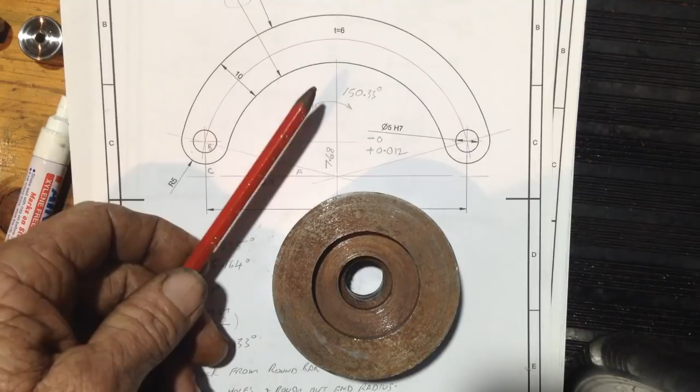Okay, our original plan was to make this out of a piece of solid round bar. Now I did have a piece of 304 stainless, but unfortunately it's not quite big enough in the OD to match up to these radiuses. And I've got this piece of mild here, but that's a bit boring. I want to go for something a bit more exotic than that.

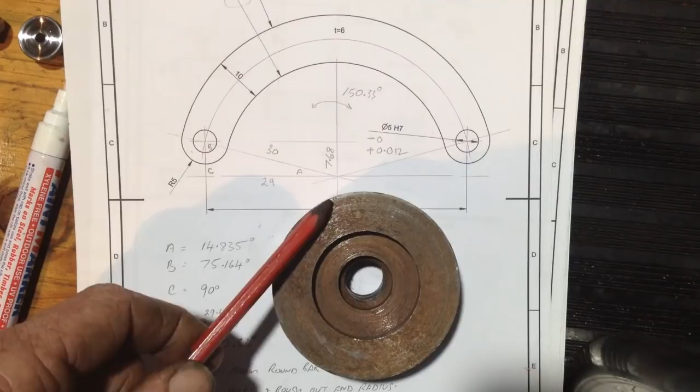But to do it the round bar method, I feel, is the easiest way, as once you'd had it in a lathe and machined the ID and the OD to match the radiuses here, you could set this up on the rotary table in the mill. All the information is on the drawing here.

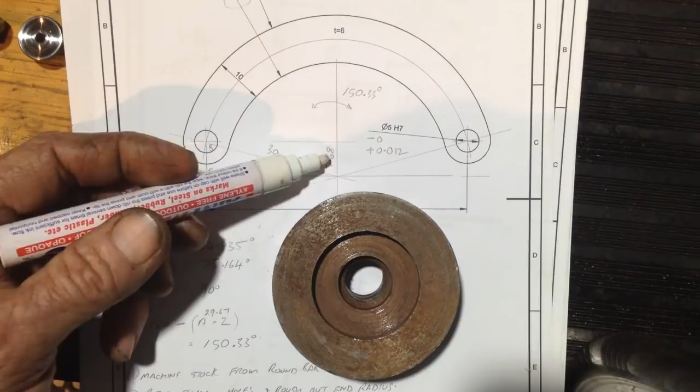You've got 150.33 degrees as your arc for your centres. You've got a 7.68 offset from the centre of your diameters or your radii to a line drawn across where the holes are. So they're easy offsets to do on a rotary table. So then you've immediately got your positions for your two holes.

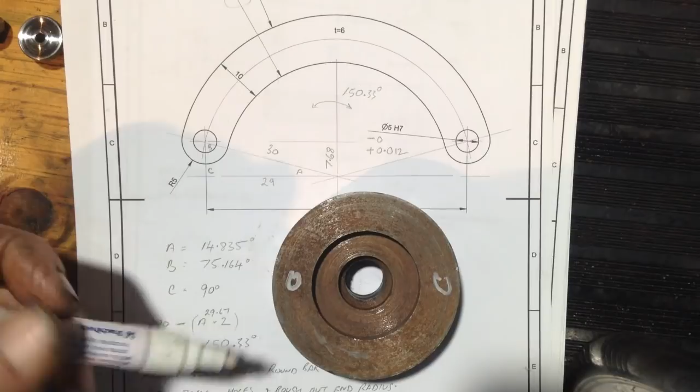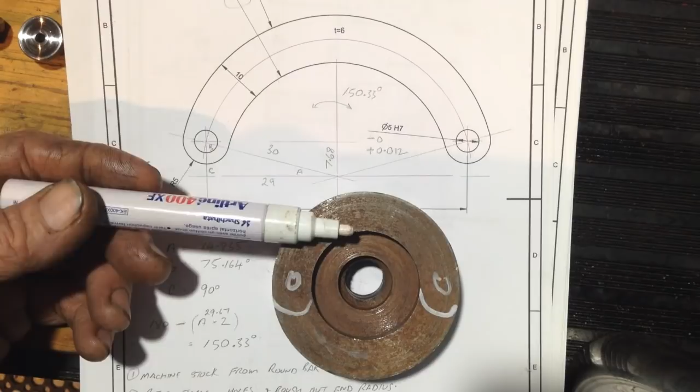And while it's in the mill, after you've done the holes, you can rough the radiuses here to size just by walking an end mill around. Don't quite go up to a scribe line, just keep a little bit away from it. So that's dead easy. So then we take this back to the lathe, we part it off, so we have this part here, and then this will be a scrap part which comes off. So then we put this back in the rotary table.

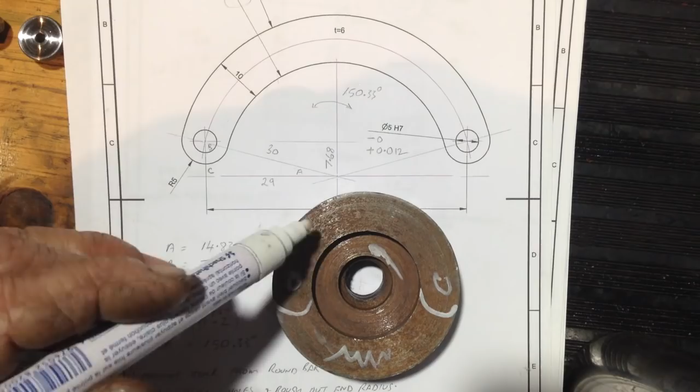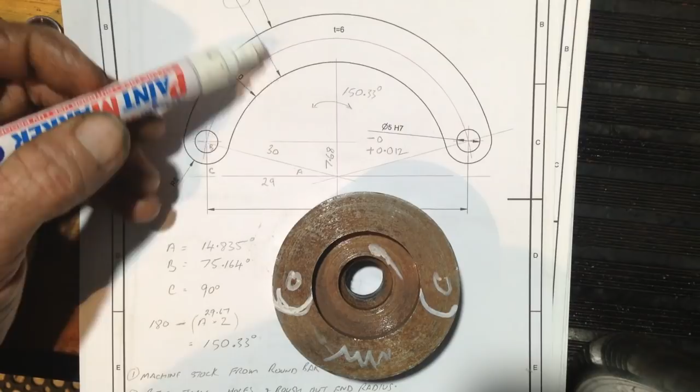We put a dowel pin in our hole, and then the part that we're making, we slip over the dowel pin, and we can put a little end mill in, and we can walk this piece around by hand, pivoting on the dowel pin, and that'll neatly trim that radius up exactly spot on. Now, if you pay a lot of attention to getting these radii absolutely spot on, everything will match up nicely. But unfortunately, we're going to go a different method. We'll swing you around and show you that.

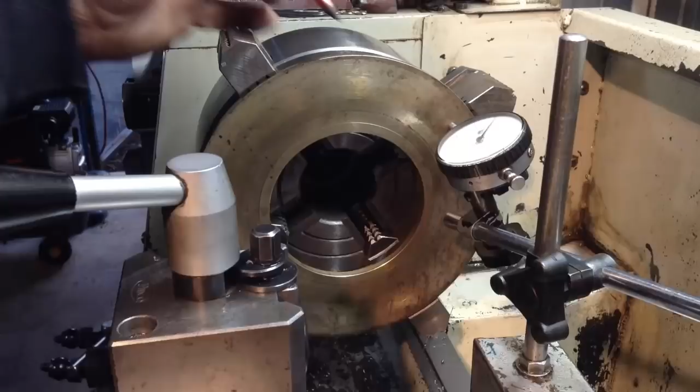So we have this piece of aluminium bronze. It's pretty tough stuff to machine. This is an old thrust washer out of a machine. So all we're going to do is skim both sides of it, because it's worn, this face is not even, as it's an old thrust washer. So we'll skim it true both sides, and that'll give us a good flat piece of material to work with, because this is 1/4 inch thick, so we've got to take it to 6mm thickness as per the drawing.

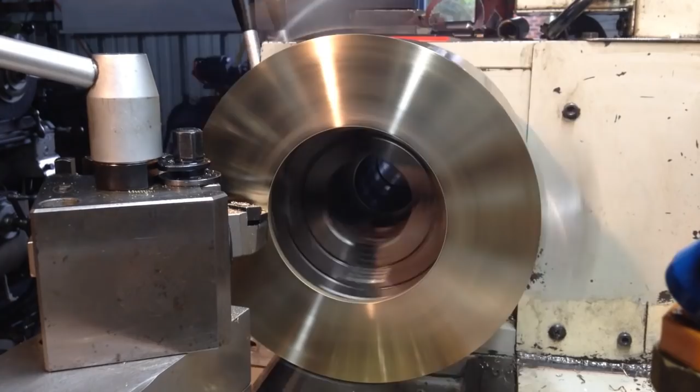Oh, that's cleaned up nice. Yep, no, that'll be fine. That'll be really good. Okay, so that's all the lathe work done for this part. So all the rest will be in the rotary table in the mill.

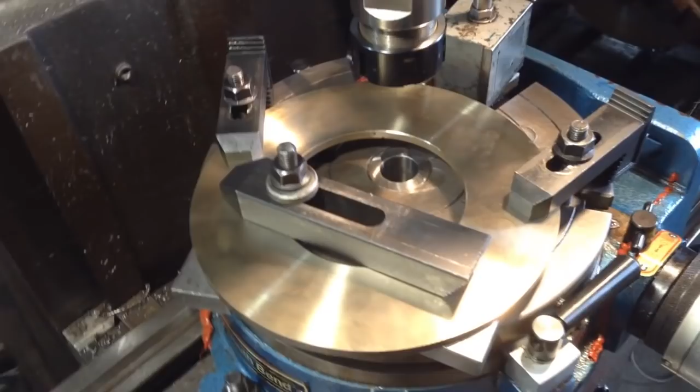We have our aluminium bronze ring pretty well securely clamped down onto the rotary table there, and we've swept the rotary table and lined it up with the quill. So we're right on centre of the axis of the machine.

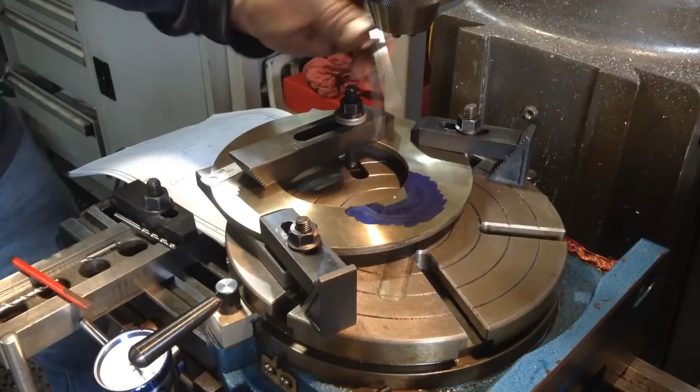So what the plan is now is we'll put a cutter in and we'll move the table. All our movements will be on the table, and we'll just step across to do our first radius, step across to do our second radius, and then we've got the PCD for the 2 holes in the middle. Okay, we're just laying out our radiuses just so we don't have a bozo moment.

Okay, so our first one is 25mm and 30 to the centre and 35 to the outside. We'll start off getting our 2 holes drilled in this plate first before we start chopping it out. That way it gives it maximum support.

So I just have an indicator set up on to monitor the table travel as well, and that helps me maintain the 0 position off the dial, just to take up the backlash, because now I've got to start winding the other way. So it's just compensated for the backlash, and I can reset the 0 on here. Knowing full well the table hasn't, I can bring it back to the true spot there.

So we've got to go 30mm. So that's 5, 10, 15, 20, 25. So 30mm. Bring it down, we'll check it against our anti-bozo lines. And we're right on the money.

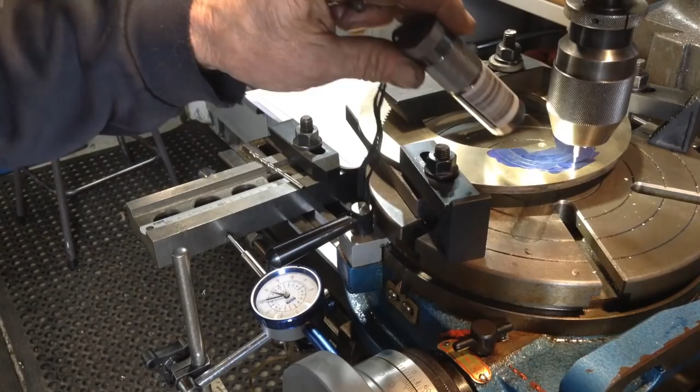So what we've got to do now is rotate the rotary table till our first hole lines up. So we're going to move the rotary table around 75 degrees, 9 minutes 36 seconds. That gives us our first hole location, because we're on the centre there. So, what was it? 75 degrees, 9 minutes 36 seconds.

Okay, so 75 degrees, 9 minutes, 36 seconds, which is there. Okay, that's our first hole location.

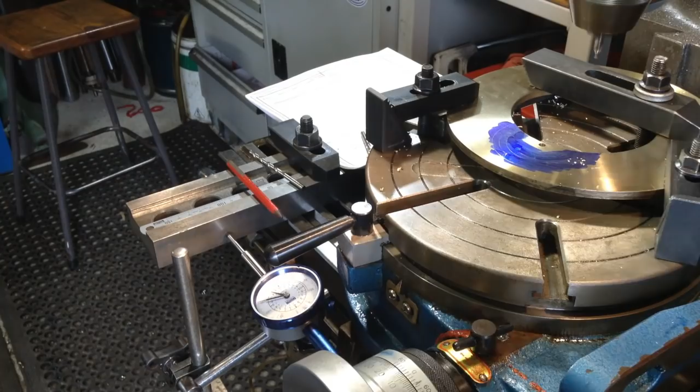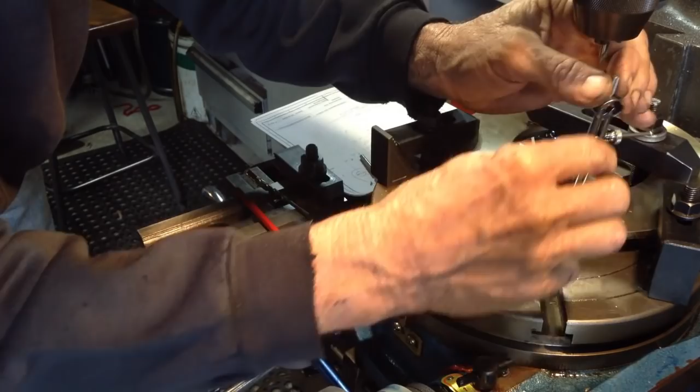Now, before we drill too deep, I'm just going to scribe the end circle radius around. Just lower the table. This will just help us when we start freehanding in the radius. A bit tricky. Nah. Just a guideline. Okay.

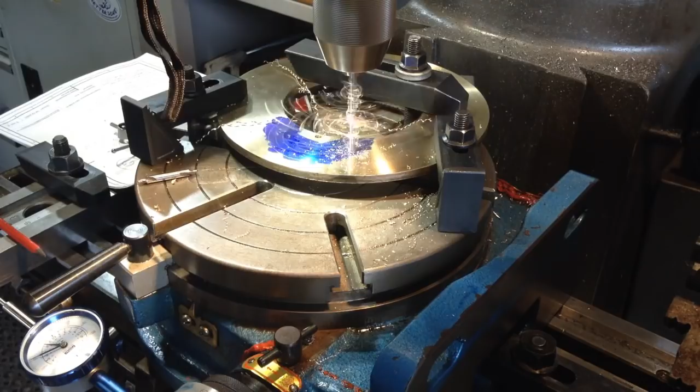We'll put our pilot hole in. Now, this is supposed to be a reamed hole because it's a pretty close tolerance hole. Now my reamer, I do have one ordered, but she's still in the post. So there's a couple of tricks you can do to a drill bit if you haven't got a reamer.

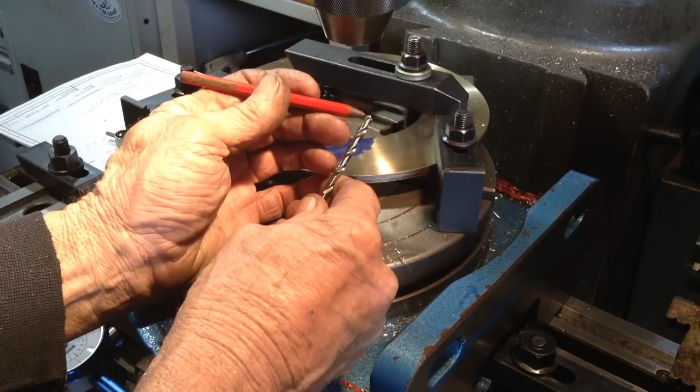You just very gingerly grind off the very corners, just radius the tips of the corner of the cutting edge there. And then I've just cleaned up down the side with an oil stone just to reduce it a little bit. And I did a test hole just here, and we're drilling just under 5mm. So it should be good.

The spec for the hole is minus nothing plus 0.012. We're better off on the tight side than going over the 0.012. So, okay, that's it. So yeah, that gives us a nice tight fitting hole, that. So if the reamer does turn up in the post, I can always run it through, but I don't think we're going to need it.

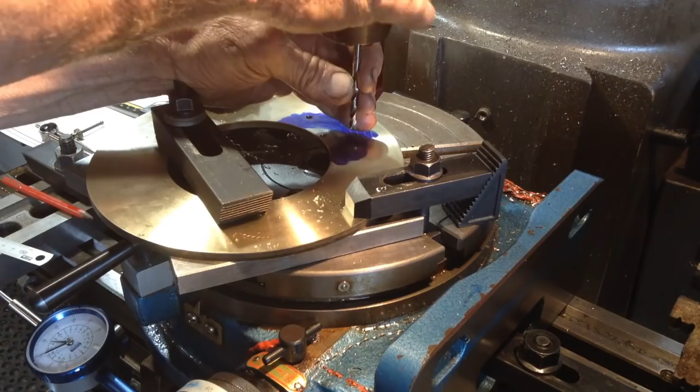Supposed to be a steering wheel coming in the post for this mill, courtesy of a kind gentleman over in the States. Would be really good for these sorts of jobs rather than this little Bridgeport handle. You know, I think it's a lot more sensitive with a steering wheel for close-up sort of work.

Okay, this is our drill reamer. Hole number 2. It's just taking a few thou out. Okay, we're looking good. Okay, so we'll swap over now to an end mill. We'll start cutting the shape out.

Before we start chopping the parts out, let's just give this thing a little bit of bling. I think the bling it deserves. So we'll just put a bit of a radius recess through the centre of the part.

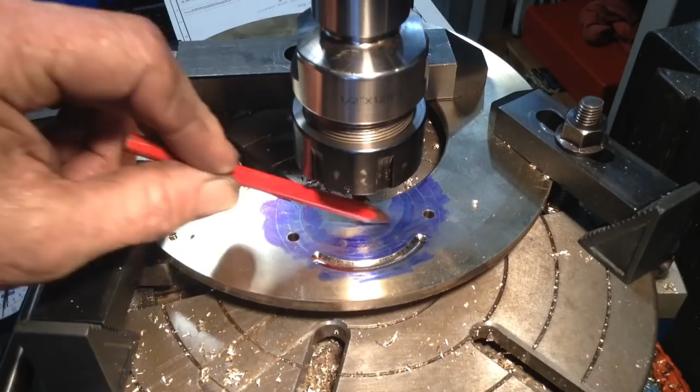There, gives it a bit of bling. Okay, so we've got an end mill in now, carbide end mill. So now we can start chopping out this area here and coming up to our scribe line.

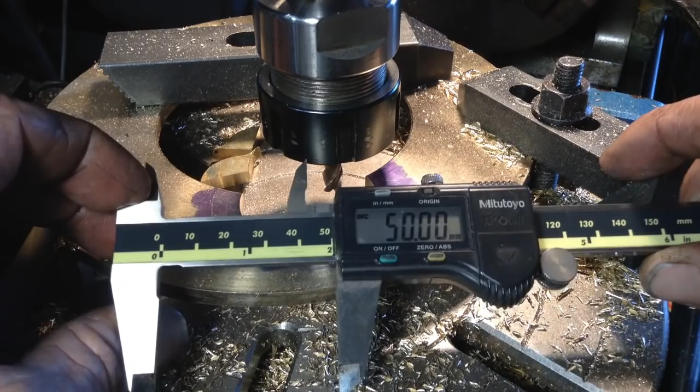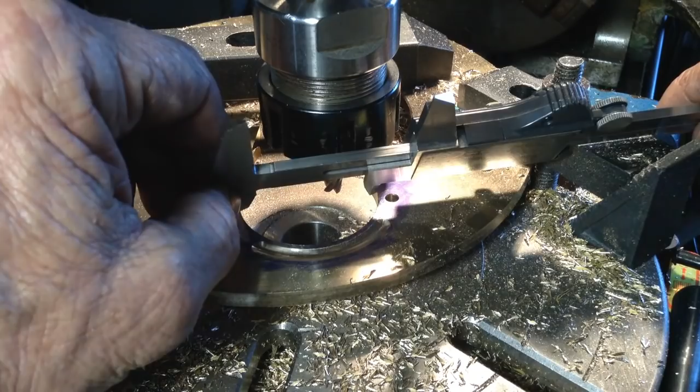Okay, so we've got our vernier set on 50mm. It's a bit of a struggle to get in to check this. And that's there, the corners are just going in. I could check it with a mic and telescopic gauge, but for this it's not required. So we're spot on size there. So now we'll do the external radius, the same process.

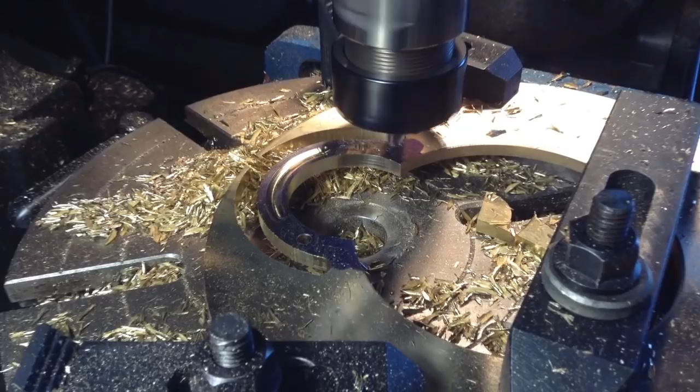Okay, as you can see, we've flipped our disc over so we can do the groove, the bling groove on the other side. So we've re-centralised the part. And that's close enough for what this thing does, so we'll get the ball end mill in and cut our groove. I've also jammed an adjustable parallel under there, because we've cut so much of this away, just to give it a bit of support.

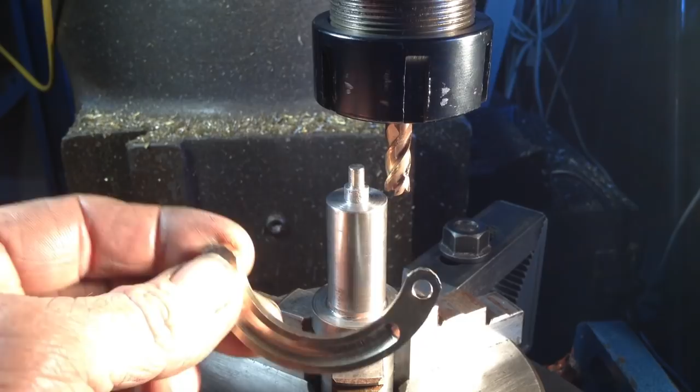Okay, that looks good. So all we've got left now is to do the end radiuses and some deburring. So our last machining operation is just to touch up these end radiuses. Now you could, if you're not used to working in close proximity to sharp cutters and rotating parts, I'd probably recommend you do this with a set of filing buttons instead of this method, but this is the method that I'm going to use.

So I've just turned down a little spigot, 5mm spigot, which our part will sit on, and then we'll just slowly bring it up to the cutter and just slowly walk it round by hand.

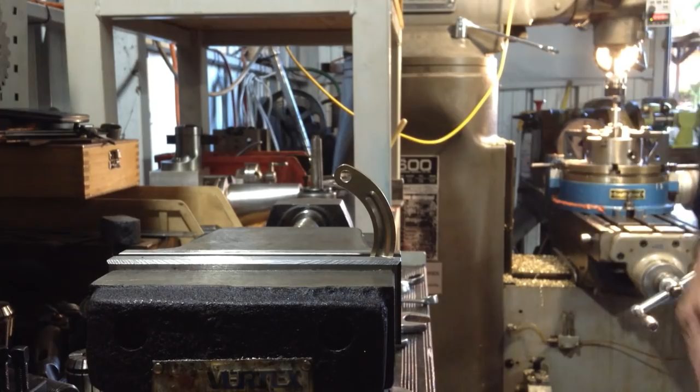Okay, we'll just touch up the intersections with a file. It should be good. So to file a radius properly, that's not really the way you want to do it, around that way. You've got to go opposite the radius, and that'll give you a nice blend line.

Okay, so I'll just use a finer file now. This file is that fine I could hardly feel the teeth on it. Just keep working it in the opposite direction to the radius. That's the correct way to file a radius.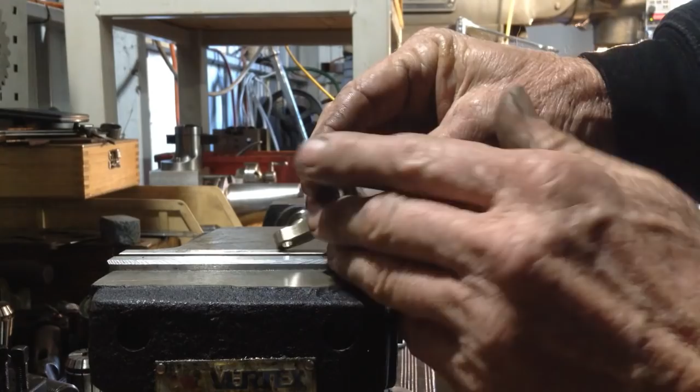Pretty hard to get this all on camera, me blimmin' hands in the way. So yeah, we've got a nice blend, blends in very nice there now. So now to touch up this little point here, I don't want to use a file on that, so I'm just going to use a piece of round bar offcut and a piece of 180 emery.

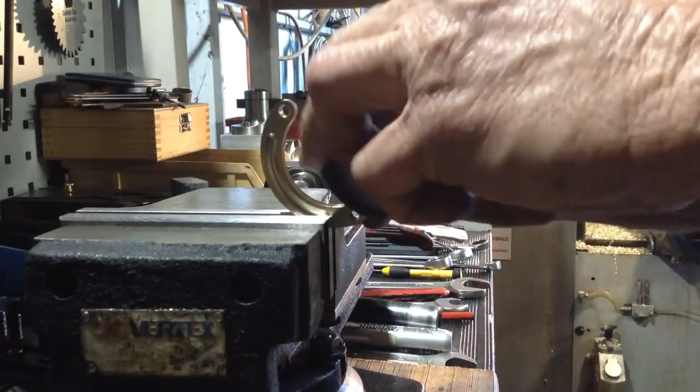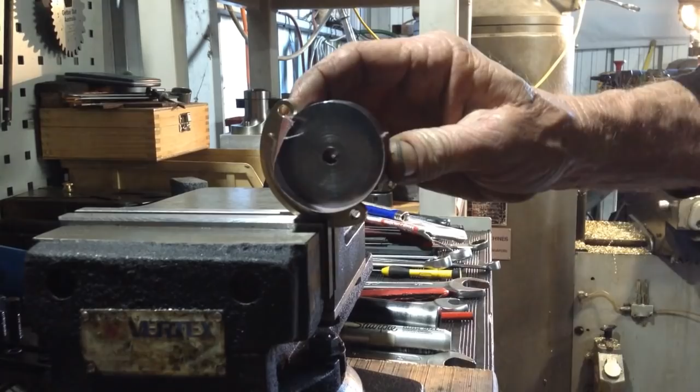And just slowly work that transition point in. And then we can finish it off. I've got a piece of 800 wet and dry.

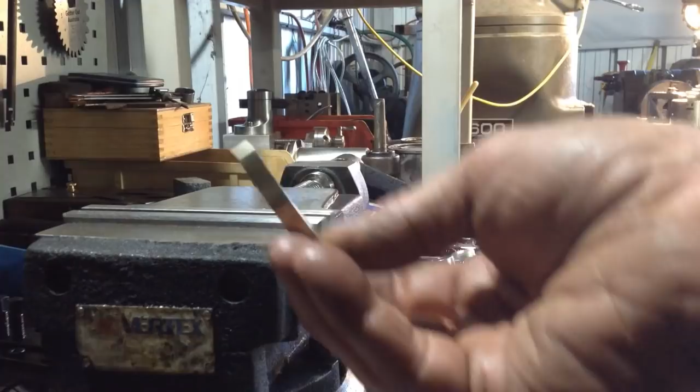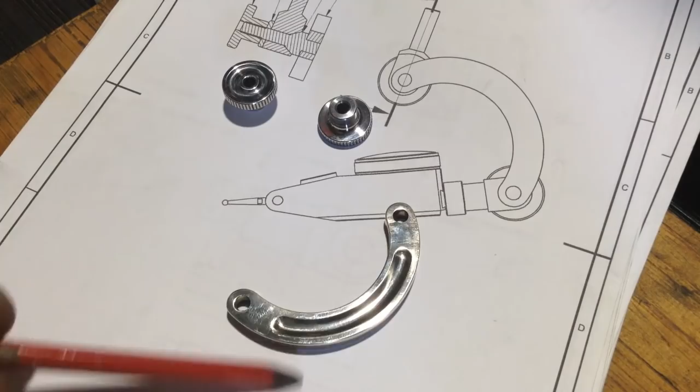Okay. So that's brought all our radiuses in. So we'll go over to the buffing wheel and just give it a bit of a shine. Okay, so after a quick polish up, I think it's come up quite well. It'll do for what it's got to do.

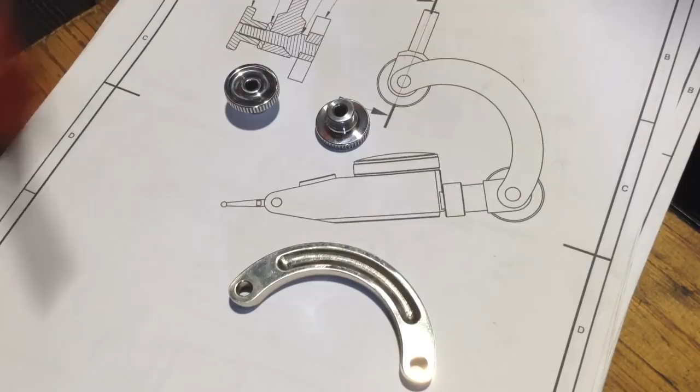So we've got to start making some of these parts now. So we'll get a bit of material chucked up, and that'll be the next video. Yeah, so those parts come up quite well. So the next thing we're going to tackle, I'd say it's probably going to be the DTI holder. Now that has that miniature dovetail in it. Now I've never cut a dovetail that small in my life, so that won't be without its challenges. So if we're going to make a pig's ass of anything, you can guarantee it'll be that dovetail. So we'll see what happens.